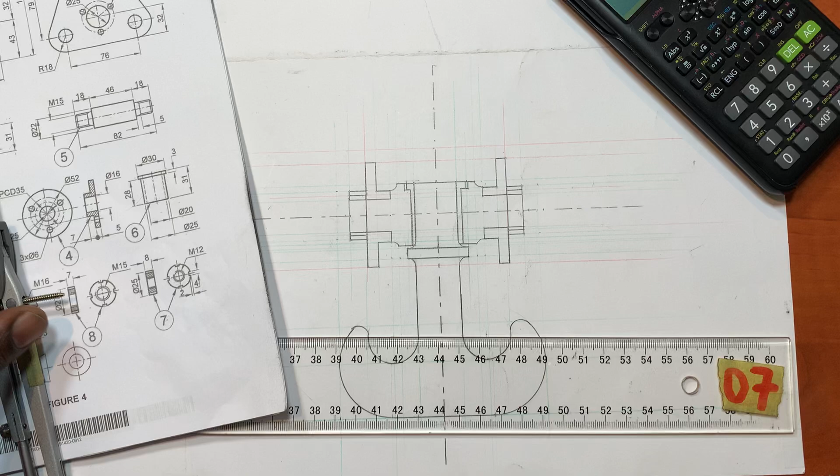So you're going to rely on what? You simply take this one. Item 2, aligning item 2 using what? Using these holes. So the holes are diameter 6, like I've said, so it's corresponding with this one. They also said diameter 6. So 6, 6, 6, still one and the same thing.

Understand? So I'm simply going to open my drawing compass to what? To 17.5. Remember, the 17.5 that I'm talking about is the center, is this PCD. PCD, I simply said 35 divided by 2. 35 divided by 2 is 17.5, between 17 and 18. So just come to the center and mark.

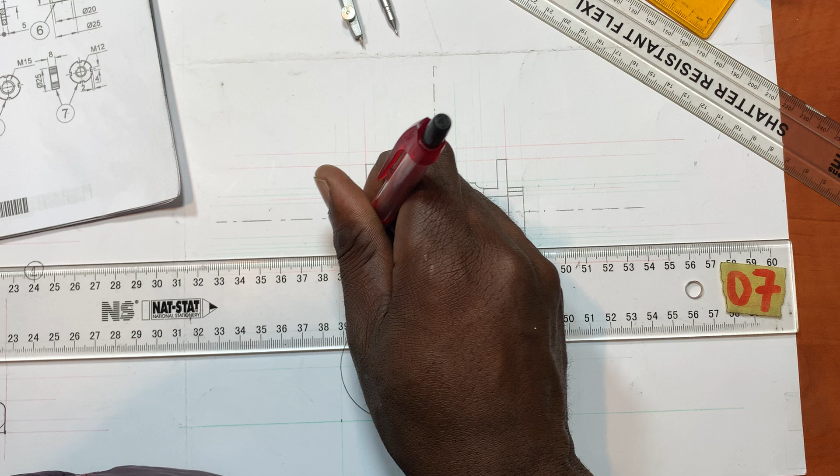So where I've marked, it's giving me the center. Even this side is going to be the center. Understand? So after you've gotten the center, simple, straightforward. You are told it is diameter 6. So 6 divided by 2, you say 3 millimeters this side, 3 millimeters this side.

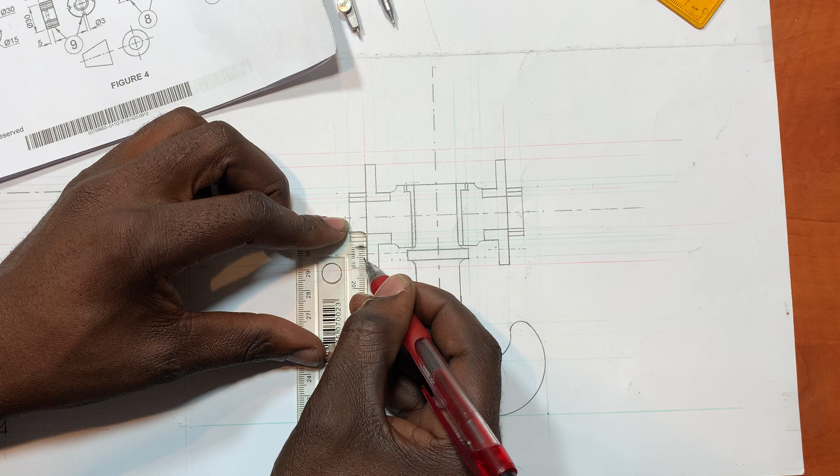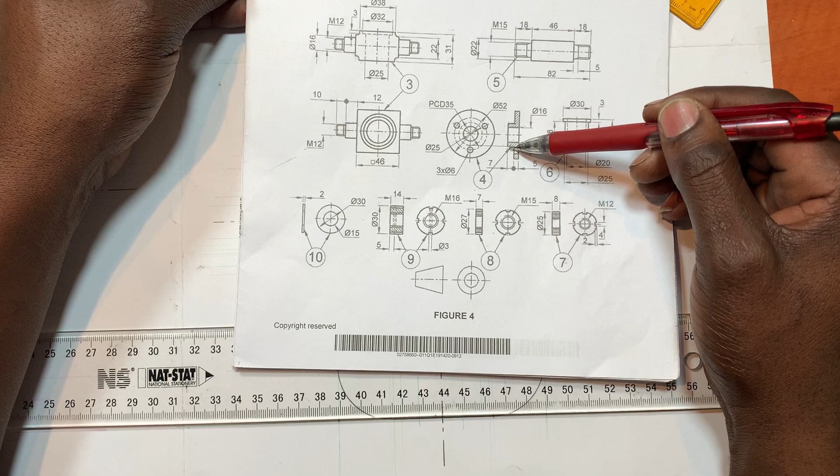Then after that, what is going to happen now? Okay, this plate, the inside diameter of it is diameter 25. So this 25 is corresponding with what? With this one. From here till here is diameter 25. You understand? So it is of a thickness of what?

Remember, I used to say to you, two or more things must agree. So item 2 is of a thickness 7 millimeters. And when you come to this one, from here till here is still 7 millimeters. So indeed, it tells you this plate is going to be fitted right here. So to draw it nicely, now you're going to rely on the center.

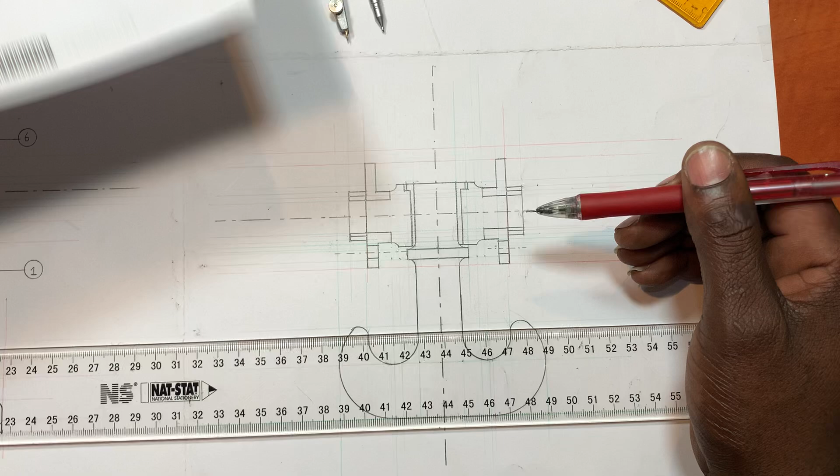On this plate, from here till here, they said 32. So from here going down, we are going to record where this plate has to be fitted, because from here till here is 25. So from this center, I'll record 32 millimeters and see where my 32 ends. 30, 31, 32, which is this one. You understand? So there is my 32 ending.

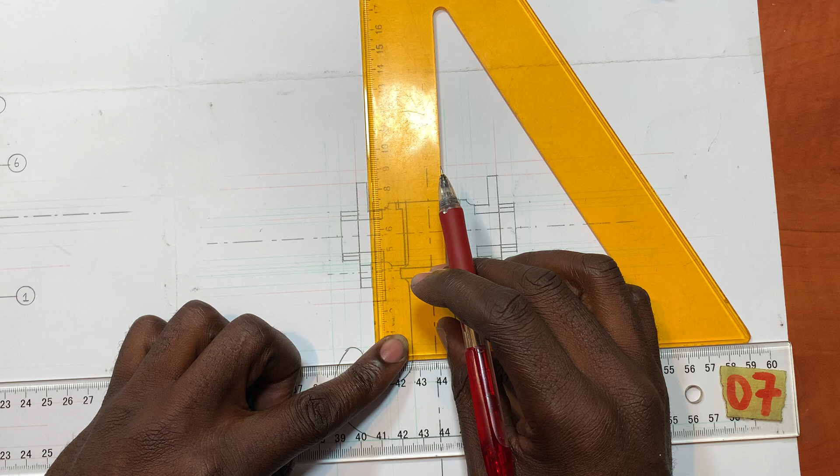So I can simply have this one solid and have from here till here solid. Now I'll come and have this one dark like this. There you go. So the moment I'm extending this one like this, I'm saying this is part of item 2. Item 2. Remember, how many times are you supposed to draw item 2? They said draw it twice. So I've already drawn it like this.

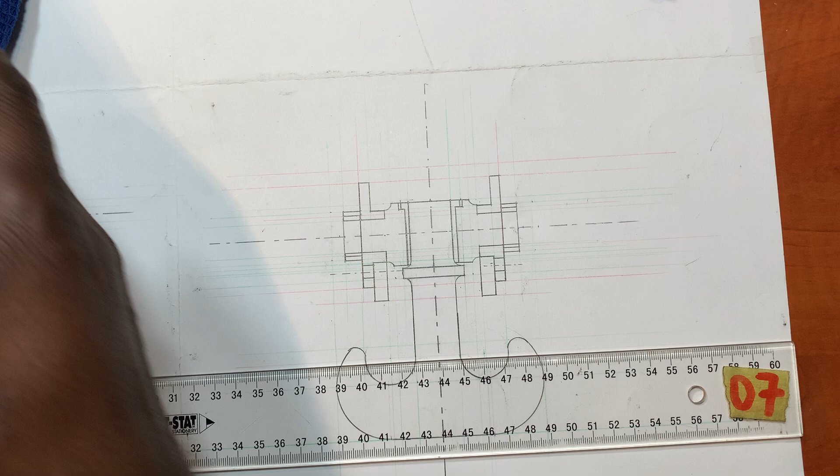Then from there, how am I going to draw it now? Just give a little bit of a zoom. Check this now, quite interesting. So from here till here is 32, which we've already taken. So from here going up, how are you going to get that?

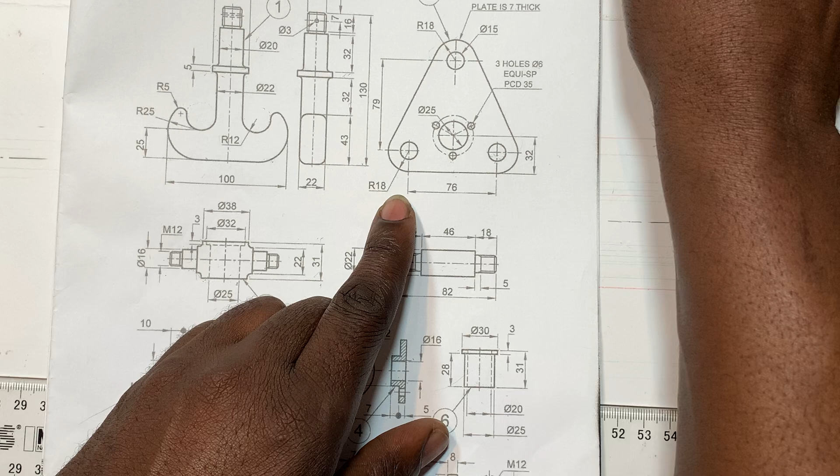From here going up, because this one from here is how much? It is 79, but this 79 is not actually starting from the center. Do you see? It's actually starting from radius 18. So from here till here is 18, isn't it? So since I started from the center going down, simple, straightforward.

From the center going down, I recorded 32, from here till here. So I can say 18, since this one is where my 32 ends. From here till here is radius 18, isn't it? I want to get the true height of it. So I can simply say from here till here 18.

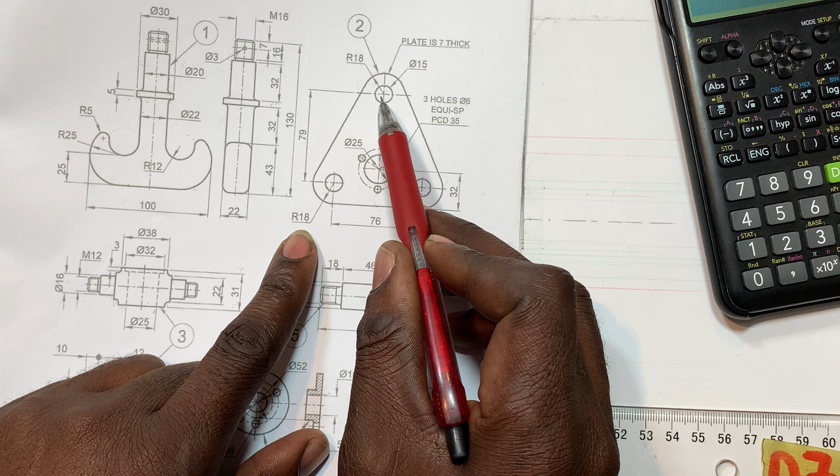So I'm going to say 18 plus 79, which is 97. And the 97 is still not going to give me the true height. I'll still have to add another 18. Simple, straightforward. So now from here going up, I'm going to record. You can even record it from the center, the same thing.

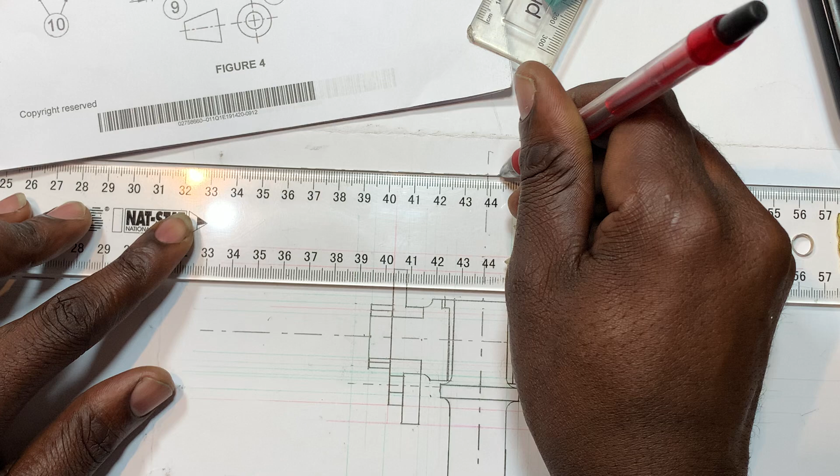97. This is 90, 95, 96, 97. Then I mark at my 0. There's my 97 ending, and it's giving me the horizontal center line. Draw it. So after I've drawn it, I can further extend this center. Further extend the center.

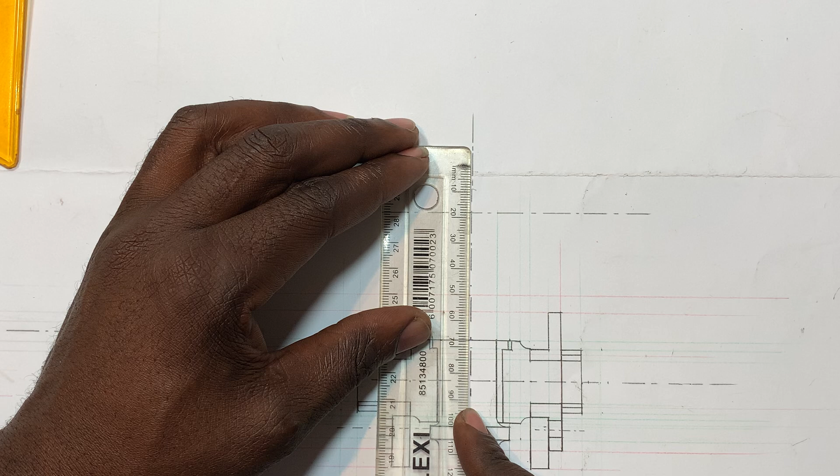Okay. Just extend the center. So that I add what? I add that radius from here till here, radius 18. Radius 18. This is 20, 19, I'm looking for 18. There's my 18. Understand? Where my 18 ends, I can put a horizontal constructional line. A1.

Then from there, what's going to happen now? Once you get there, my guy, it's going to have this one. Remember that this is going to be extended till up, but we are not quite sure. Is this going to be closed there? So it's better you draw it till like this for now. You understand? But you can just have it as a faint constructional line, faint for now.

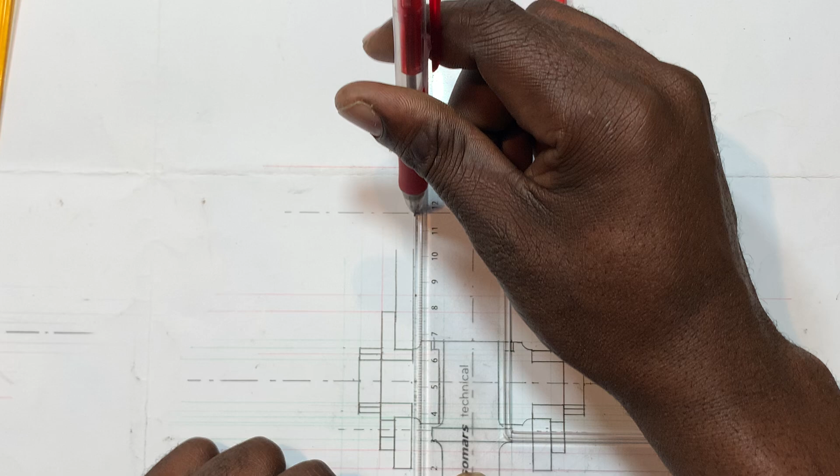But you know it is supposed to end there. So even this other side, it's going to be dark, going up like this. There you go. Just constructional line going up, right? So bring back your question. Remember, we've already dealt with these ones. Item 5 we haven't yet.

So double check the inside diameter and the outside diameter of this item 5. And how many times did they say to draw item 5? Item 5, which is the plate spacer, you have to draw it 2 times, which is 1, 2. And should we put the cutting plane here? So the other one is going to go with an offcut, the other one is going to remain. So it's going to be left there. Of what? Of item 5. It will be fitted here, inside diameter.

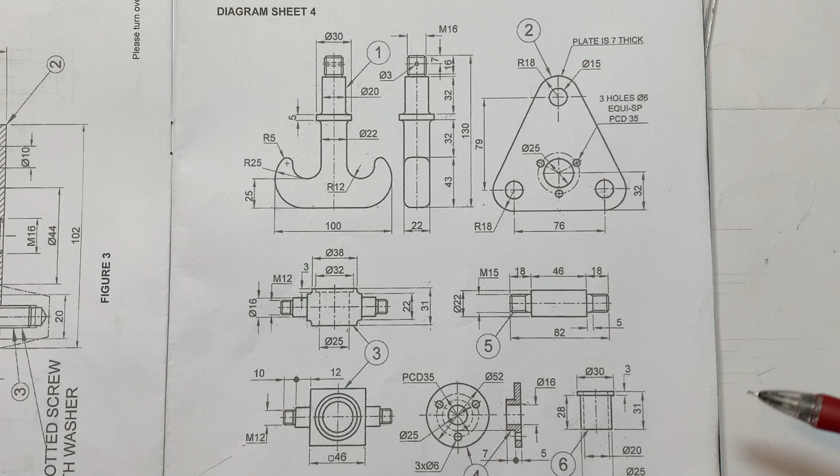So double check. From here till here is what? Is a diameter. Okay, from here till here is diameter 22. From here till here is M15. So this M15 corresponds with diameter 15. So indeed it is fitting in there. You understand? But it's going to be only this one that will be well exposed. That is going to be fitted right here.

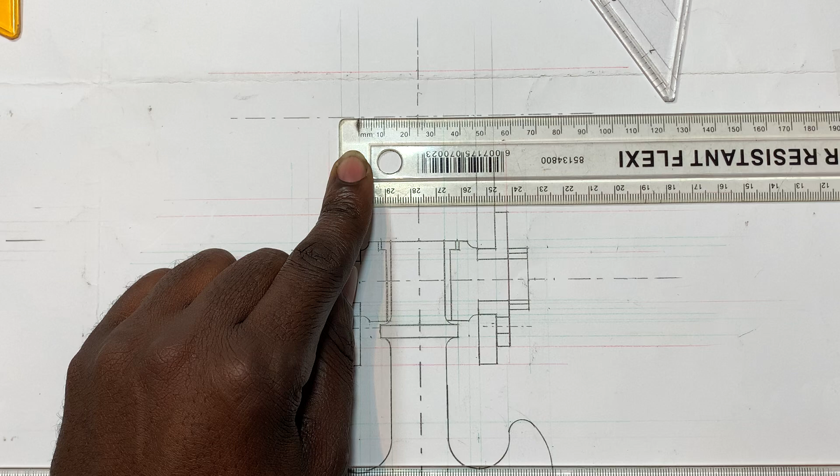So now, if we take this item 5 and fit it in there, it's supposed to be exactly tallying in there. How? If I take my ruler and record from here till here, I must be getting exactly what? 46, as far as I'm concerned. Let me check that. 46, which is this one. Do you see that we are absolutely correct? This is 40, 45, 46. It shows that we are on the right track, my brother.

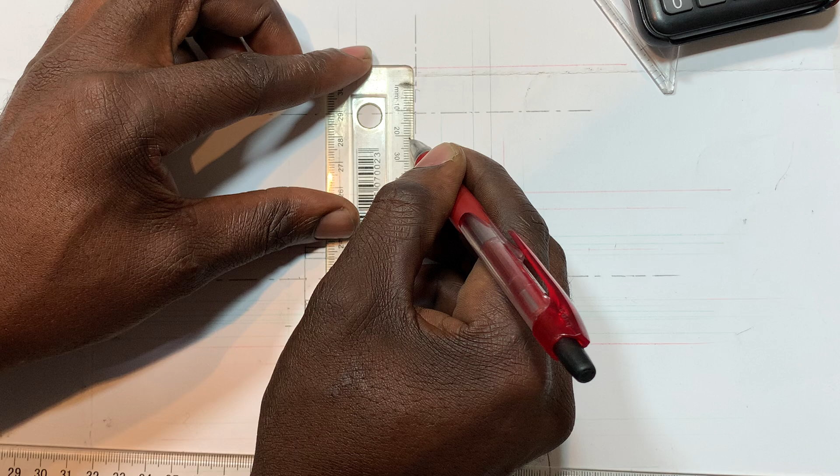Simple, straightforward. So now, we are going to draw this one. From here till here, 22. So if you say 22 divided by 2, how much are you getting? Getting 11, right? So you're going to say 11 this side, 11 this other side. How? Like this. This is 10, I'm looking for 11. Just mark it 0 and mark it 20, 21, 22. There's my 22. So I can simply have a constructional line horizontally and another one. You understand?

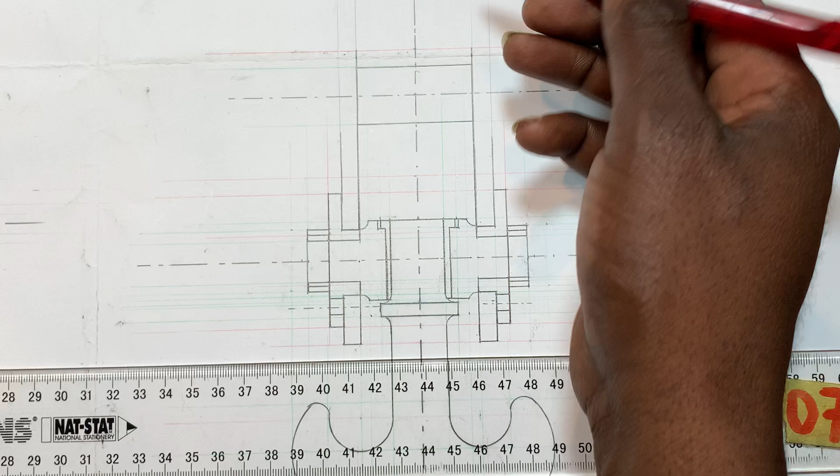So I can have this one solid from here to right here. Have this one from here to right there. And this is a shaft. We do not section a shaft when it's cut along its length. So which means I can have it dark from here till right there without fear or favor, my brother. You see, I'm already accommodating the true height of this plate of mine.

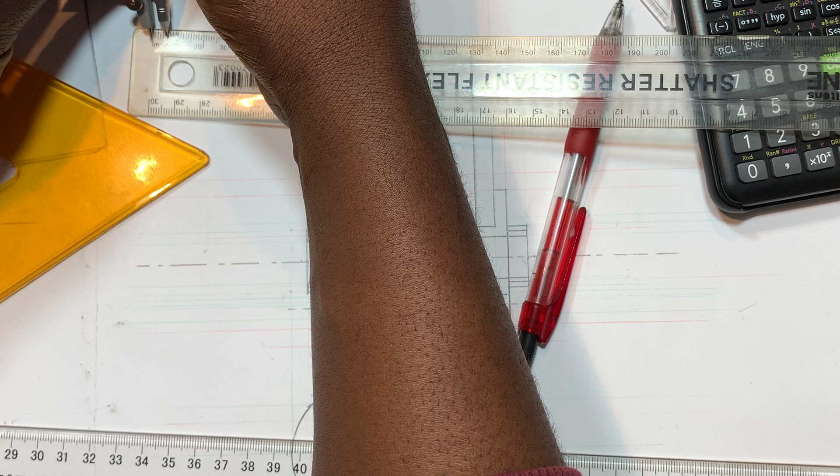Five, 6, 7.5, between 7 and 8. So I come and place it here. I mark and mark. Then after that, I can come and have this one construction line. Have this one construction line. Okay. After that, where's my 7.5? It's this one.

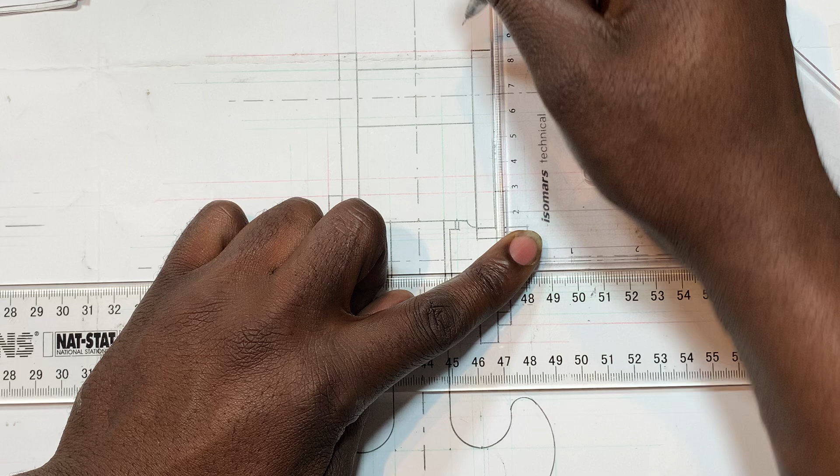So I can have this one now, this plate of mine, darken till right here and come and finish up here. Even this other side can have the same thing, from here to right there, and come and finish up right here. So that I can have this one now extended just a little bit. Just a little bit. You understand?

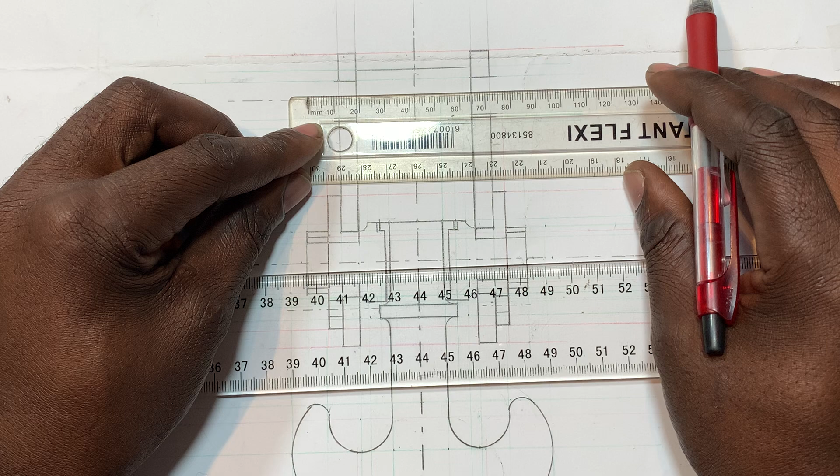So how long is it supposed to be? Bring back your question. The set is how much? It's 18 millimeter. 18 this side, 18 this side. This is 20, 19, 18. There is my 18. So I just mark it 0 and put it at 0. Then 19, 18 right there.

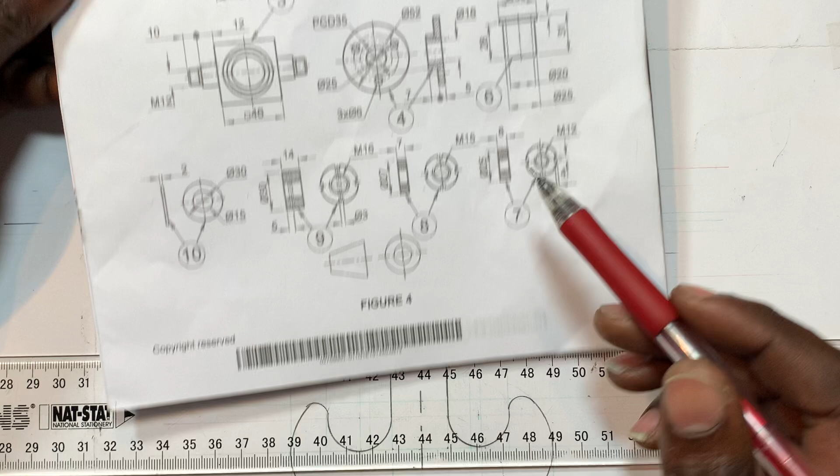Then from there, where it's ending, I can just have a constructional line vertically down, and even this other one vertically down. Okay. After that, what is going to happen now? So if it's M15, which means we must put what? Item 8. So item 8, how many times are you supposed to draw item 8?

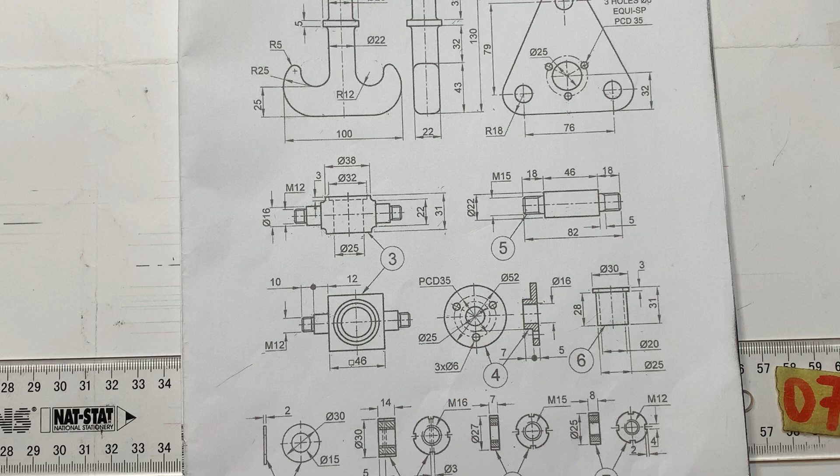Item 8 is the long nut, 6 times. So if they say 6 times, it's supposed to be 2, 4, 6. 1 this side, 1 this side. Come. 1 this side, 1 this side. Come. 1 this side, 1 this side. So that is why they said 6. So you have to be very careful of that. If they say 6, it doesn't mean that you'll be drawing the whole 6. You get what I'm trying to say?

So by the look of things, we will be drawing 2 rather than 6. You understand? So it's M15 corresponding with that one, M15. Okay. Now, when you look at your item 9, we haven't inputted item 9 yet, and item 9 is already clear enough. Do you see that it's the pin that has to run through there?

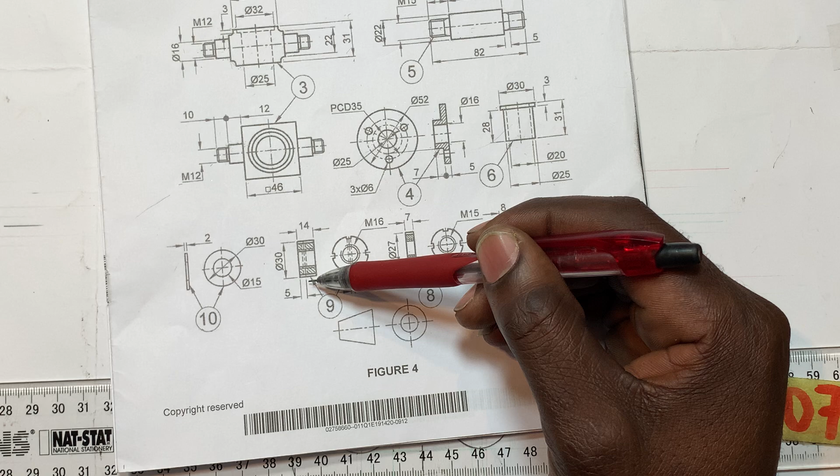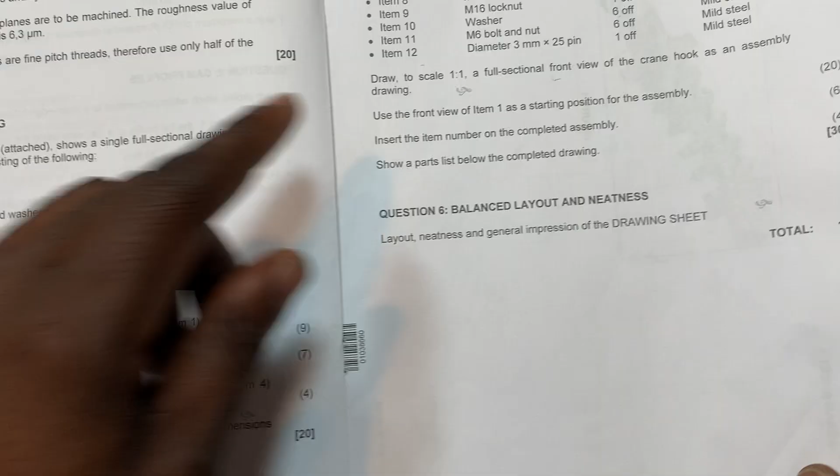So item 9 must correspond with what? With this one. So remember to hold this thing steady. So you have to put your item 9 on top there. Simple, straightforward. You understand? So after that one, put item 10. Look at item 10. The inside diameter of item 10 is 15 millimeter. And how many times did they say draw item 10? I'm sure 6 times as well. Item 10, 6 times.

So which means 2, 4, 6 again. So in other words, we have to draw 1 this side, draw 1 this side. Get what I'm trying to say? What is the thickness of it? They said it's 2 millimeter. So to draw that is going to be right here. Remember, I said to you, extend it just a little bit. I can put it at 10. So 1, 2. You understand? So even this side, 1 millimeter, 2 millimeter,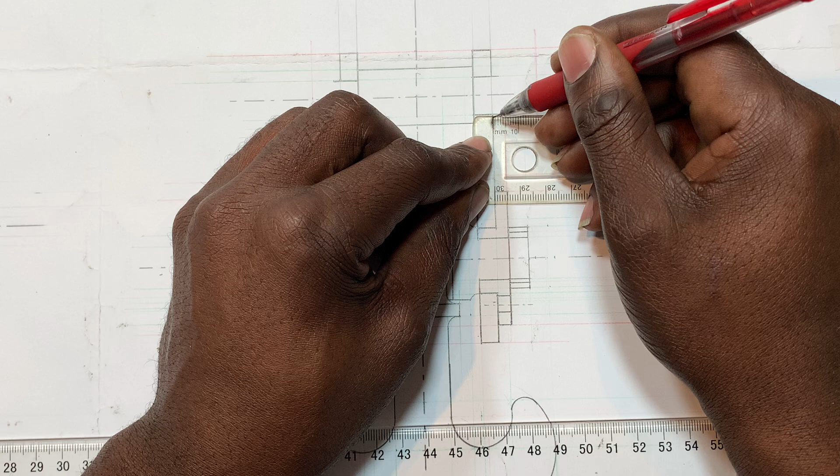ending right here. So even this other side, remember I said just extend it a little bit. 0, 1, 2. They said a thickness of 2 millimeter. 0, 1, 2. You understand? Then after that, what is the outside diameter? Outside diameter, 30 millimeter. So 15 this side, 15 this other side. So I mark it 0 and mark it 30.

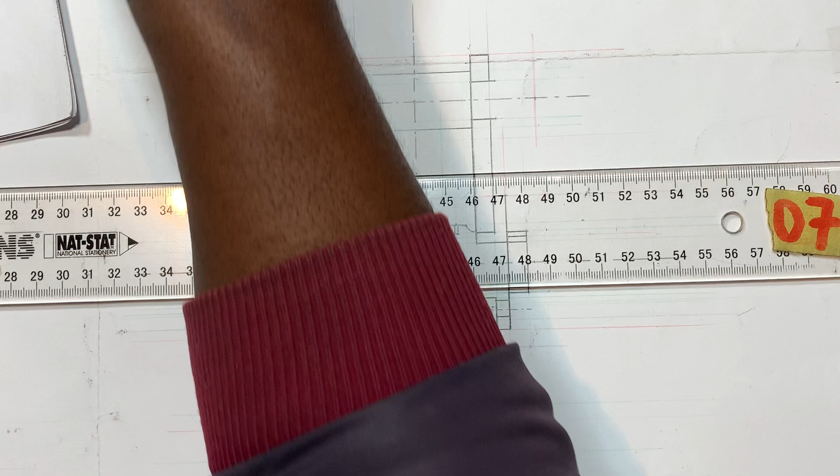Then I can have a constructional line, such that I can have this one faint. So from here till here dark, from here till here dark. Again this other side, from here till here dark. So that I can have this one solid, this one solid, this one solid, this one solid. Since we are going to put a nut now, we have to close here. Close it here.

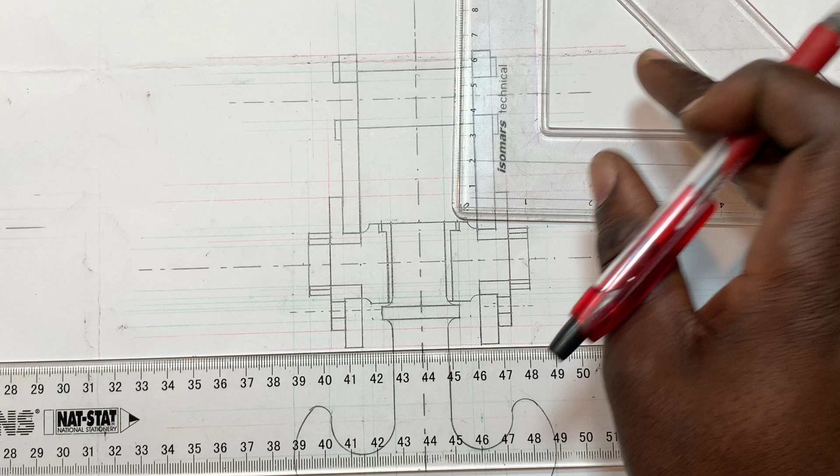Let me double check. Is it going to be closed? Because we are going to put this one. Yes. Okay, there will be this part of a shaft. So I cannot close it. It's going to be well exposed. So I can leave it like this. So where's my 18 millimeter ending? Right here, and right here, 18 millimeter.

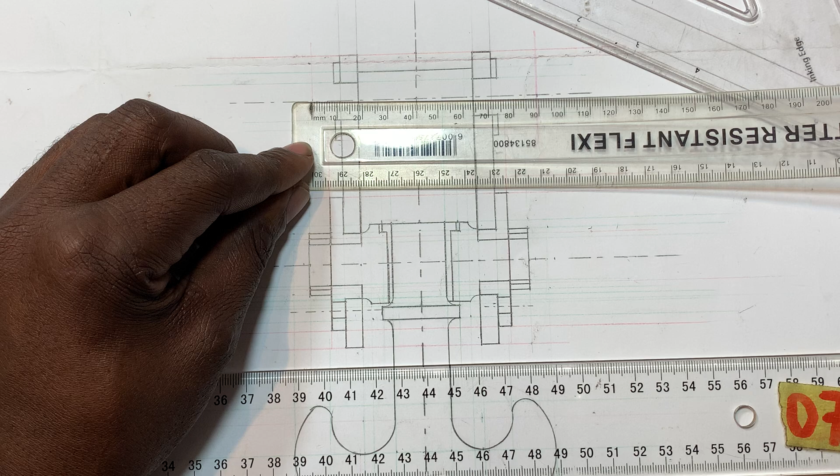Yes, right here. So now, after this one, we can begin to put item 8. Item 8 is of a thickness 7 millimeter, inside diameter 15, which is this one. Thickness 7 millimeter. So which means I can just have a constructional line. That's going to be like this.

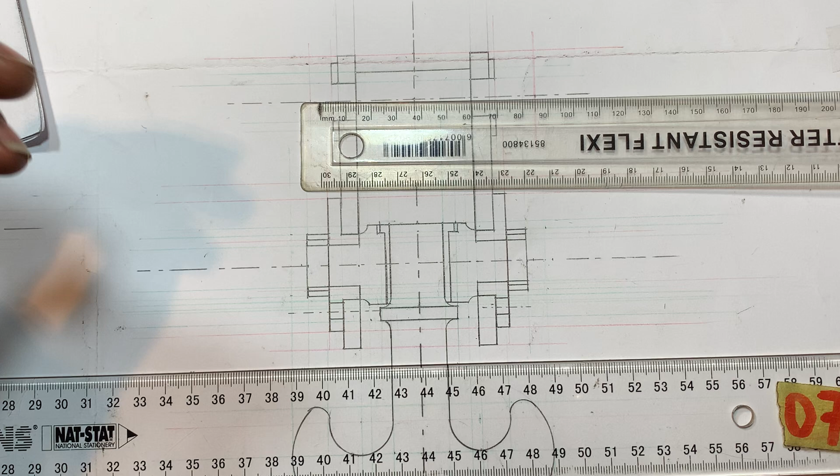That's going to be like this. So I'm going to record how much? 7 millimeter. 5, 6, 7 millimeter. Just that one. 5, 6, 7. That's the thickness of the item. There you go. It's gonna end here. There you go. It's gonna end there.

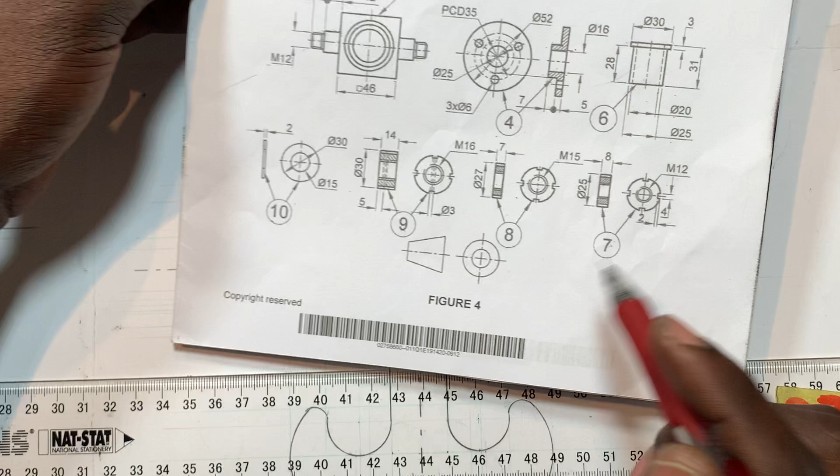So the outside diameter of it. Item 8. So remember, item 8 from here till here is 27. We are given everything here. So 27 divided by 2, how much are you getting? 13.5. This is 13.5, between 13 and 14. So I can come and place it at the center, and mark here, and mark right there.

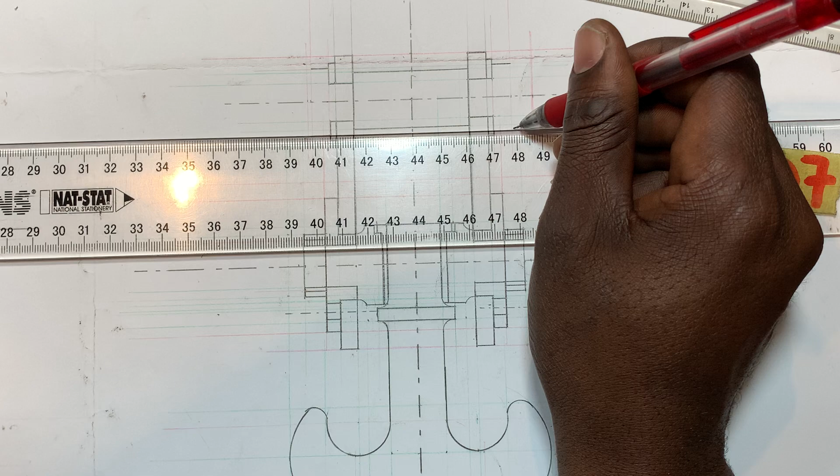Then from there, constructional line, but from here till here, solid. From here till right there, solid. This one solid. Then I bring them down again to the shaft. You understand? So this should still be part of the shaft. This one. Then you come and look at the what.

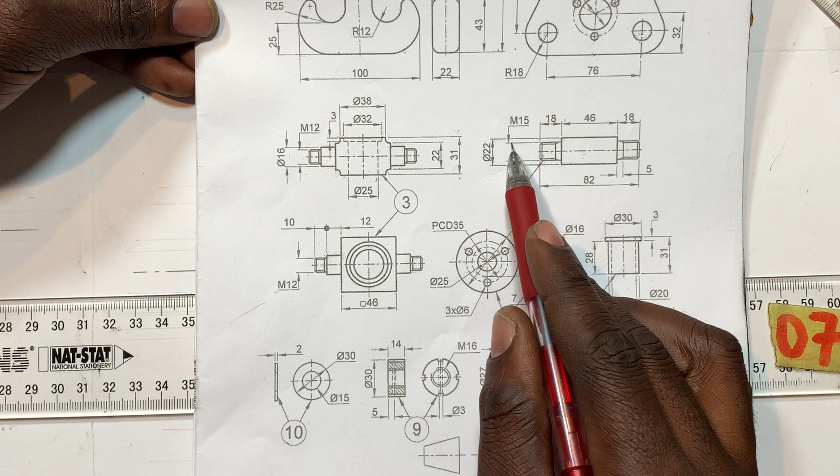So remember, the shaft is supposed to end there, and this shaft is M12, no, it's not this one. It's M15. So I'm going to say 0.1, which is the thickness of the thread, times 15. So it's 1.5, which is already that one. Do you see? 1.5 is between 1 and 2. You understand? So from there, you have to do this one.

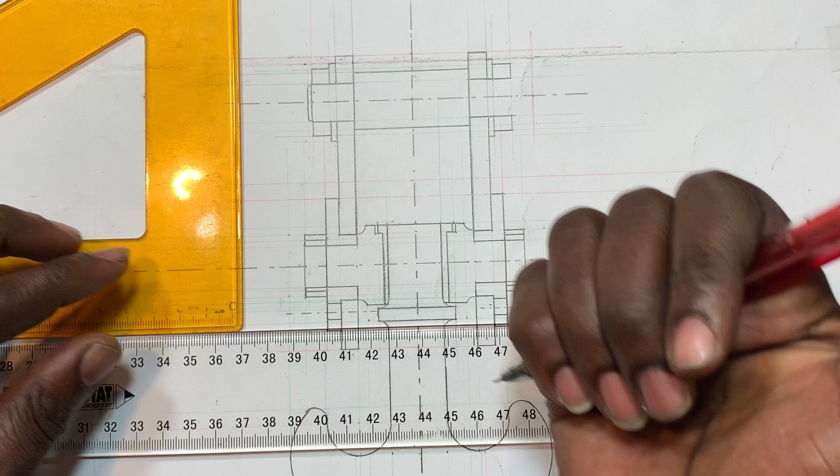45. Is it 45 or 60? Yes, it's 30. It should be like this, this is 30, and I was actually on the right track. Then close it. There you go. Which one is this that I'm drawing? It's actually that one from here till there. So from 18. So where is my 18 ending this side? There is my 20, 19. There is my 18 ending. You understand?

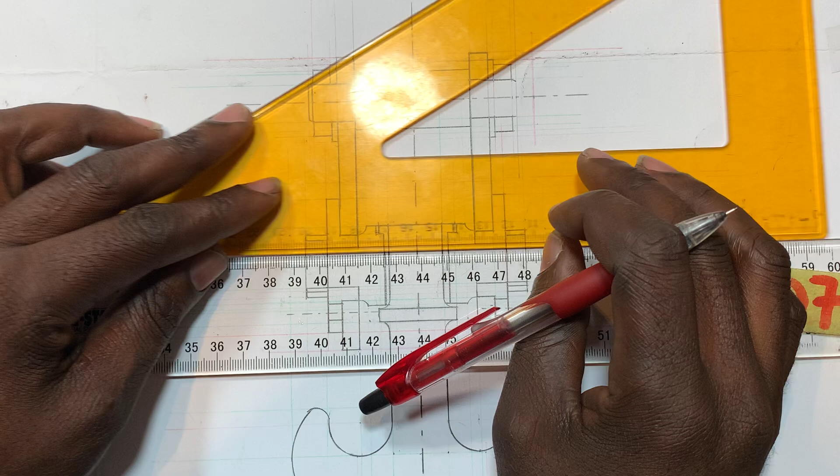So there you go. What I did this other side, I'm now doing this side. Even this side. There you go. So here it's gonna come back and have a solid line here till right there, and another one right there. So in other words, you draw this shaft exactly the way you see it.

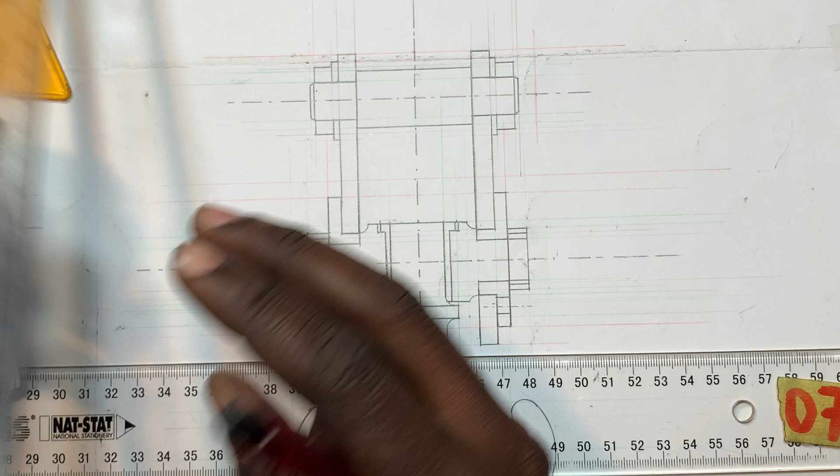But then double check the nature of your item 8. Remember, item 8 is still having that 2 millimeter. So which means from here till here has to be 2 millimeter. So 0, 1, 2. There's my 2. Even this side, 0, 1, 2. There is my 2 millimeter. So that I can have this one solid from here till there. Even this other side from here till right there. So I'm done with item 8.

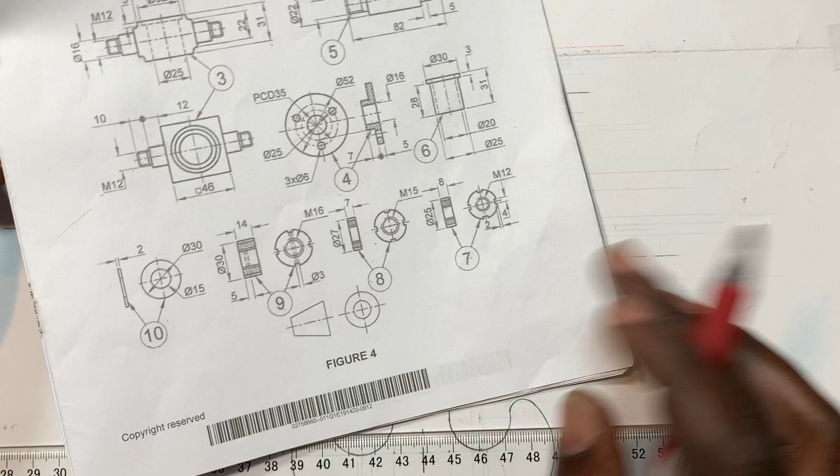So the very last item that we have to look at is item 9. The item 9 is going to be fitted down right here, my brother. Remember, we haven't done with your item 1. I said to you, you are going to record. Okay, we've already recorded the 130. So the 130 is starting from here till right here. You can still double check if you've forgotten; your 130 is that one. You see, it's actually ending right there.

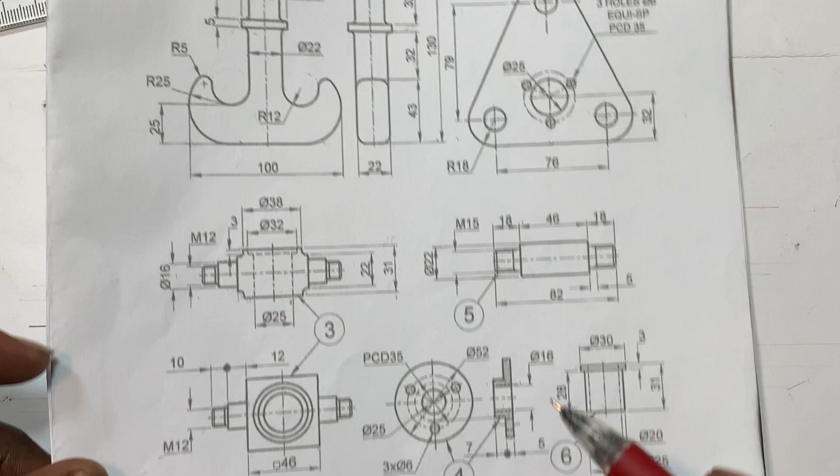You understand? So it's of M16, and when you take a closer look, item 9 is M16 again. I said to you, two or more things must agree, which indeed is going to be fitted there. So we are going to remain with these ones. It's of diameter 3 millimeter. Do we have 3 millimeter? Which is that one. Simple, straightforward. That's how you assemble it. It's gonna enter, interlocking each other.

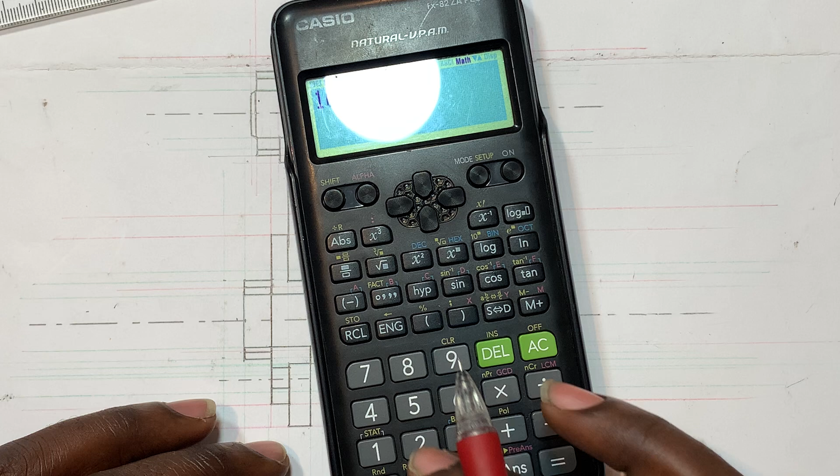So what we can do now, we will divide this 16 by 2, which is 8 millimeter. So I'm going to record 8 millimeter this side, 8 millimeter this other side. I'm looking for 8, which is this one. So I mark it 0 and mark it 16, which is this one. Then after that, I can just have a constructional line for now.

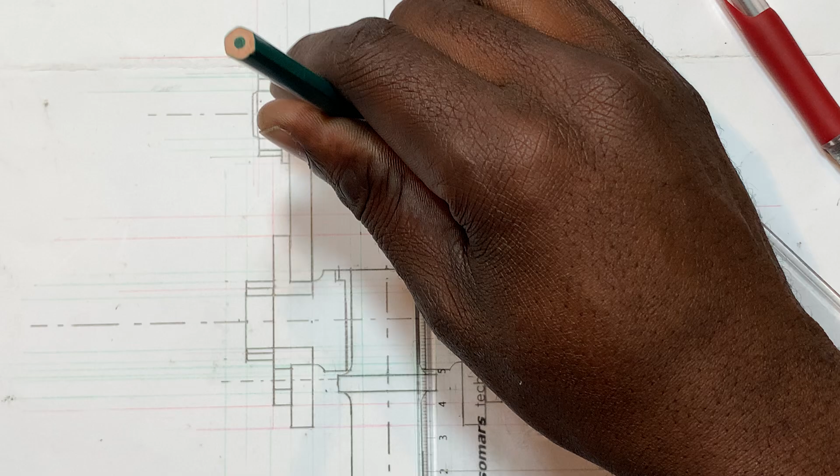Constructional line. Make them clear. Constructional line. Constructional line. Okay. So if you are done with that, what is going to happen now?

So from here till here is 16 millimeter. So I'm going to record 16 from here going down. So 15, 0, 10, 15, 16, which is that one. I want, which is this one, ending right there. Just have a constructional line.

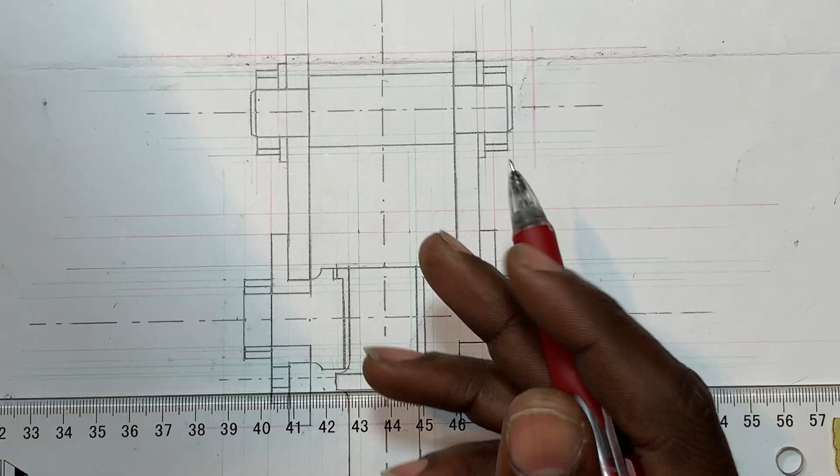So this smaller linear thickness is which one? Is that one that at the beginning of the lesson I said is gonna come out by itself. So the thickness is 16 millimeter, whereas the thickness of this lock nut that we're supposed to put there is 14. So we have to align it using what? Using that 7 millimeter. So from here till here 7 millimeter.

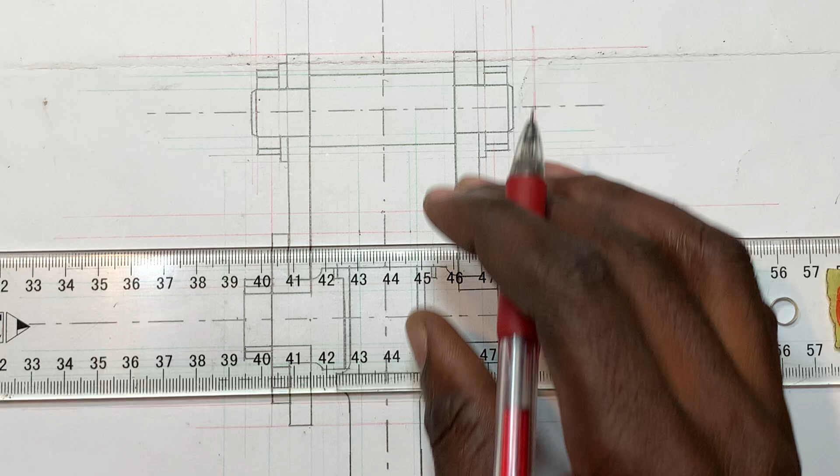From where your 16 start. So my 16 begin here. So I have to record 7 millimeter. So 5, 6, 7 millimeter, which is this one. So I'm drawing this center line, horizontal center line, which is that one.

Remember, I used to emphasize that horizontal lines, a constructional line as well as your center line, they must exceed your drawing, because you can see even here it's exceeding, but the inside hidden details doesn't exceed, but you can actually see your center lines exceed. So that is why even me, I'm drawing a little bit bigger.

So now I can come and get the outside diameter of this item 1. So from here till here is 30. So I'm going to say 15 this side and 15 this other side, which is this one. So I mark here and I mark at 0. 30 and a 0. So I can have this one faint, this one faint. So the thickness is 14.

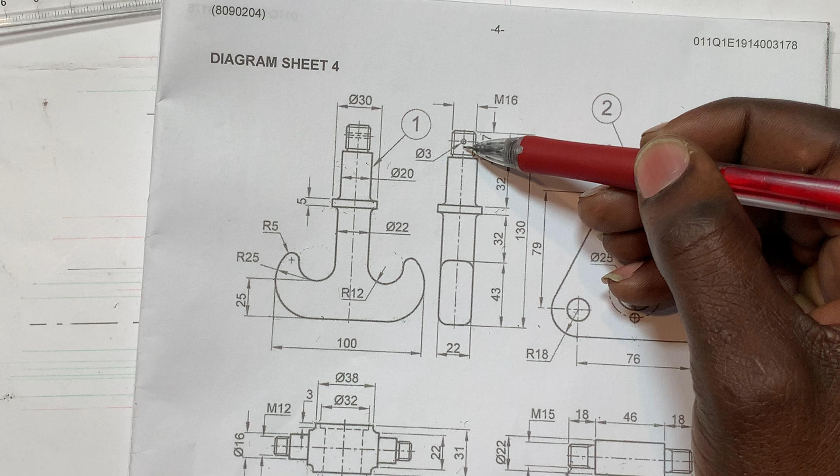And which correspond with what? With that 7. Do you see I'm actually reading the 7 from what? From my item 1. So it's corresponding with this thickness 14, because the half of 14 is 7. So I've already said from here till here 7 millimeter. So from here going down it's another 7 millimeter.

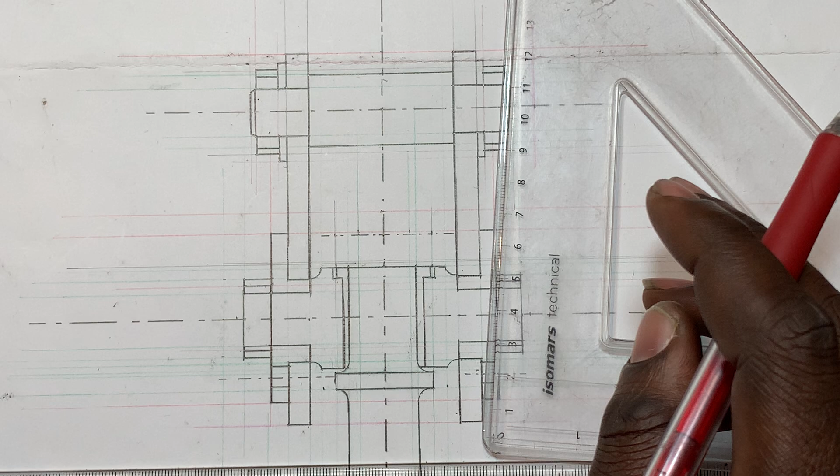From here, which is another 7 millimeter, which would be that one. A1. Then, which now I'm going to have it dark. Dark from here till here. Dark from here till there. So this one, it should be dark from here to right there. Then this one, dark from here to right there.

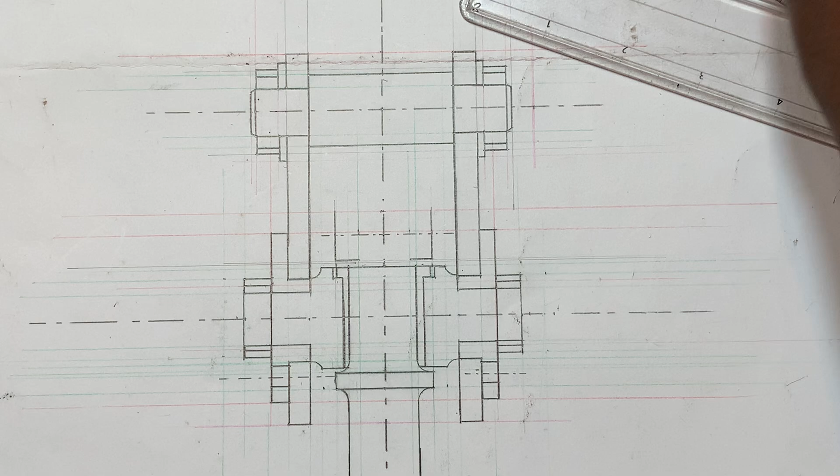A1. So remember the thickness of 16 millimeter. Because you have to go till here, go to right there. 16 millimeter. Let me double check. Yes, which is that one. Yes, it's gonna go dark till down here.

Let me double check. From here till here is what? The inside diameter, it was 20 of the bush. So from here till here is the 20 that I'm actually reading from my item 6, which is corresponding with that one of item 1. But from here till here is smaller than this one. So that is why in our drawing it is also a little bit smaller. You understand?

So there it is. You see that I'm not drawing till here, because there will be a shape. You have to get this shape. Understand? So this one dark, close it here. Close it till there.

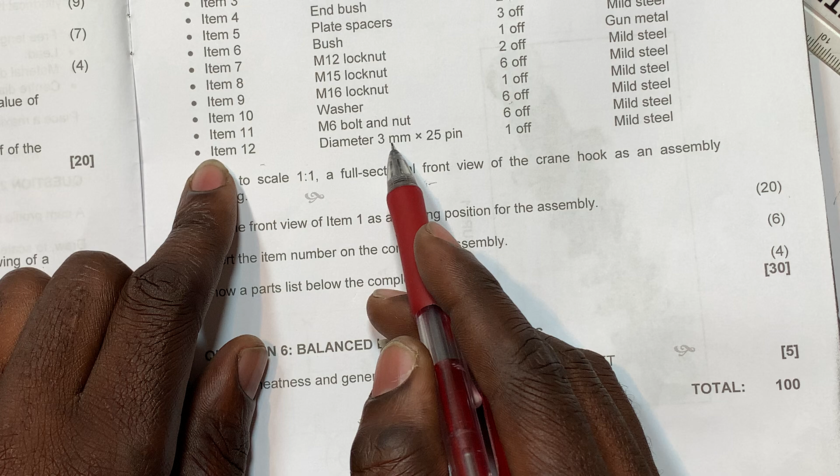So even here, there will be a pin. Where is this pin that's supposed to be fitted here? Because there is a pin of 3 millimeter that's supposed to be fitted here. Go back to your pin, item 12, which is diameter 3 millimeter times 25 pin. We have to draw it once, so 25.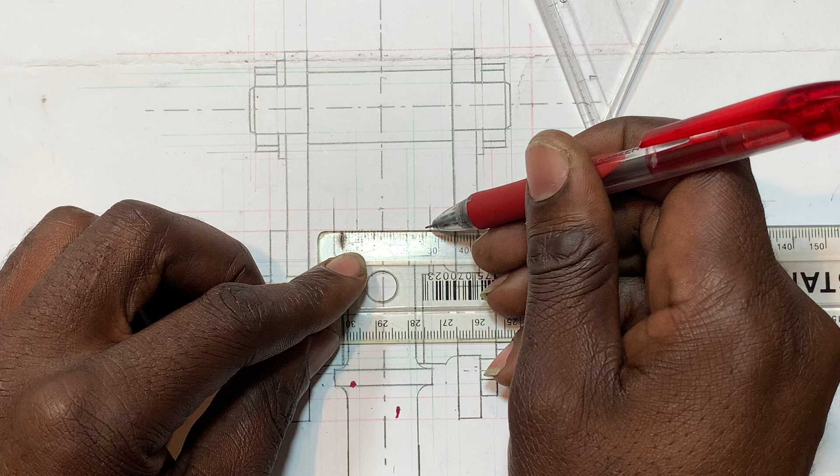So if there will be that pin there, it means I was too forward to close it here. Here you don't close it, you have to erase it here. Even here, this pin of ours, they said is of 25 millimeter, so it's going to be 12.5 this side to 12.5. This is 11, 12.5, between 12 and 13. There is our 25 and a 0 and 3 millimeter. So this pin of ours is supposed to end here and here.

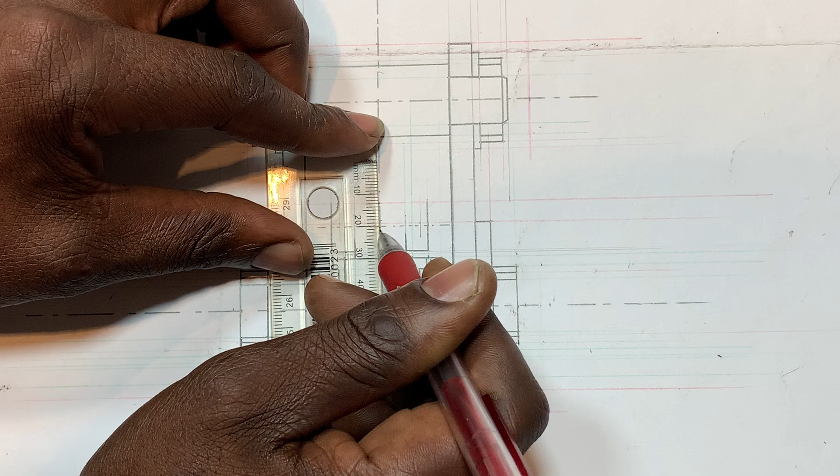So when you say 3 divided by 2, you're getting 1.5. So you're going to say 1.5 this side, 1.5 this side. Something very small. Let me do like this. So this is 0, 1.5, which is here, 0, 1.5, which is right here. So it's going to be drawn dark. So it should be dark from here to right there.

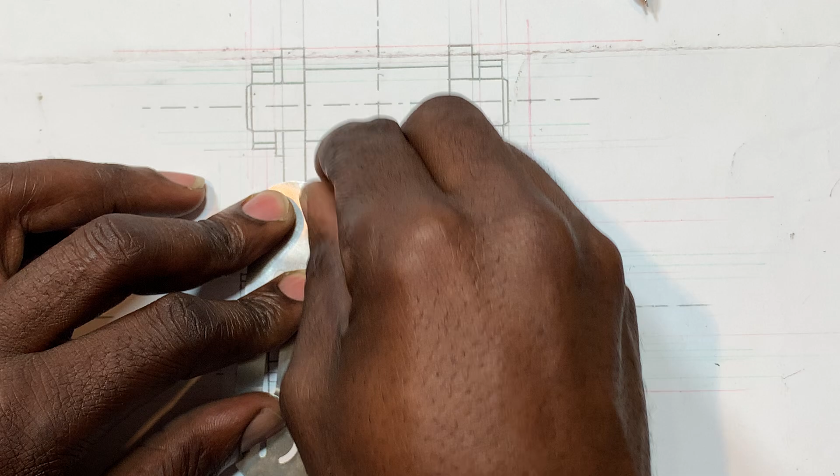From here to right there. Just erase it a little bit there. Erase it a little bit again. So this is going to be that pin, which they said is not shown. It's going to be that pin of length 25, diameter what? Diameter 3. So I can now have this one solid.

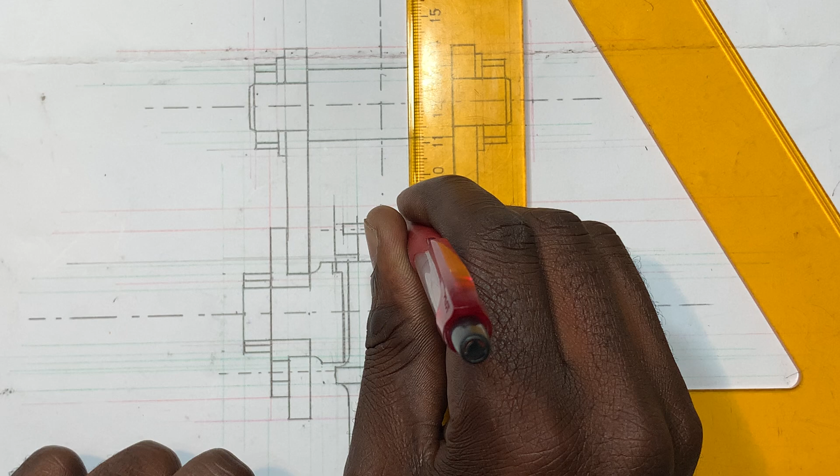Remember, we draw it solid. That's why I was like, we were too forward. It's going to be solid up until this pin. You stop even here. Then beyond the pin, it can go. Understand? So from here till here, it won't be dark. That's what we were erasing actually. Okay. So now it's gonna go dark till right there.

So now let's double check, because as far as I'm concerned, this nut of yours is not gonna end on top there. It's of a thickness 7 millimeter. Double check, simple, straightforward. This is 5, 6, 7 millimeter, isn't it? There is my 7 millimeter. Then I can place it at the center. I mark here and I mark there. Okay, I've already done it, which is a little bit down. There is my 7 millimeter.

As such that now I can have this one dark from here till there, and complete it dark here, like this, and like that, so that we have this one dark here, dark right there. So from here till here you can erase it. You see how small it is? Something very small. Which is this one. Even this other side you can remove it, my brother.

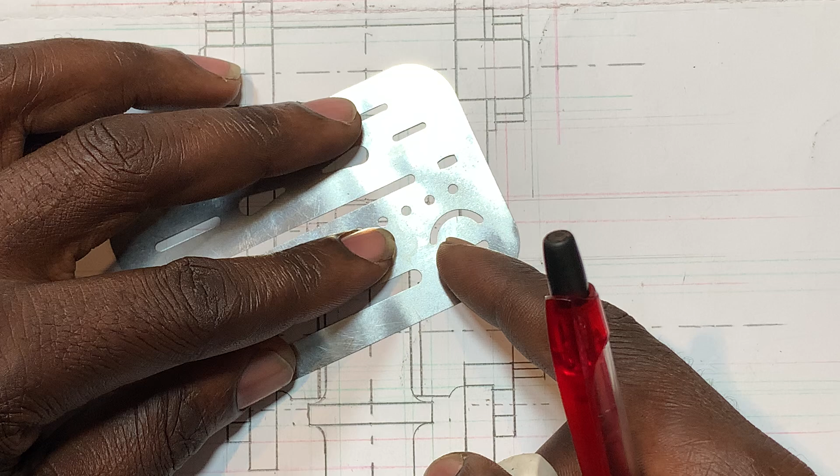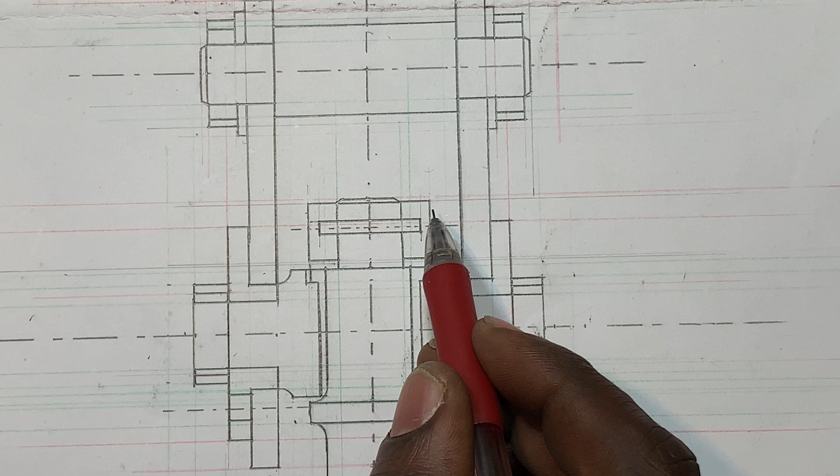So it's going to be a sharp corner. Okay. Once you get there, erase this one. Erase this one. So now you can simply see your item 9 clearly. But then it has got that smaller 2 mm, which is what you did in your item 7. So it's supposed to come this side. You understand? So which is going to be this one.

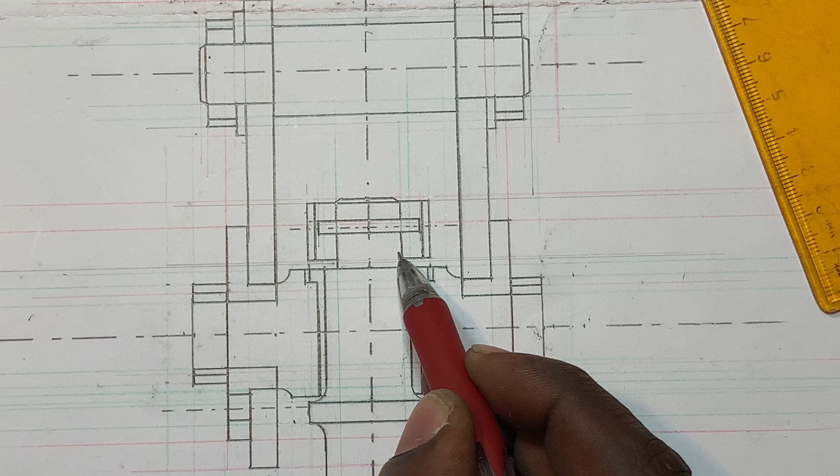0, 1, 2. One, two. Something very close by. So it's going to be solid here and solid here. So when you section, you'll be sectioning here, but here you don't section it. So I can have this one a little bit extended till here, because it's supposed to be like that in general. Yes. Then if you're through to such an extent, you are done.

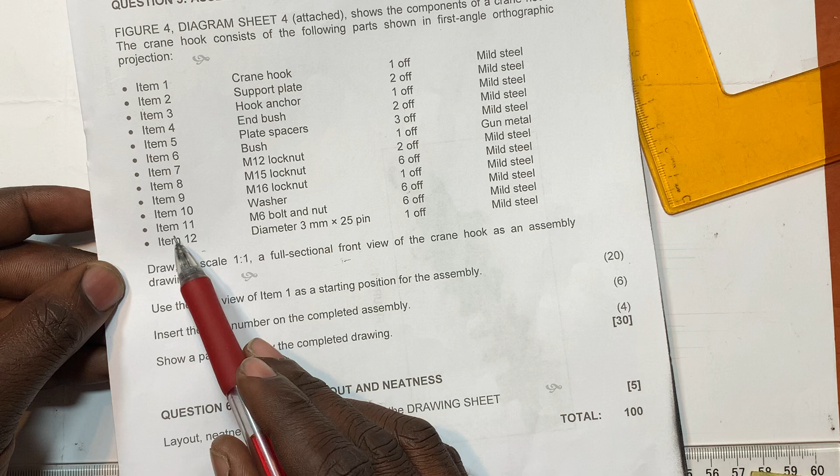We can begin to section now. And we are not yet through actually. There must be a, double check, what was supposed to be fitted here? Go back to your bolt. They said item 11, which is M6 bolt and nut, supposed to be fitted here. So we were too forward again. Where's my eraser? To have this one closed from here till here of the bush.

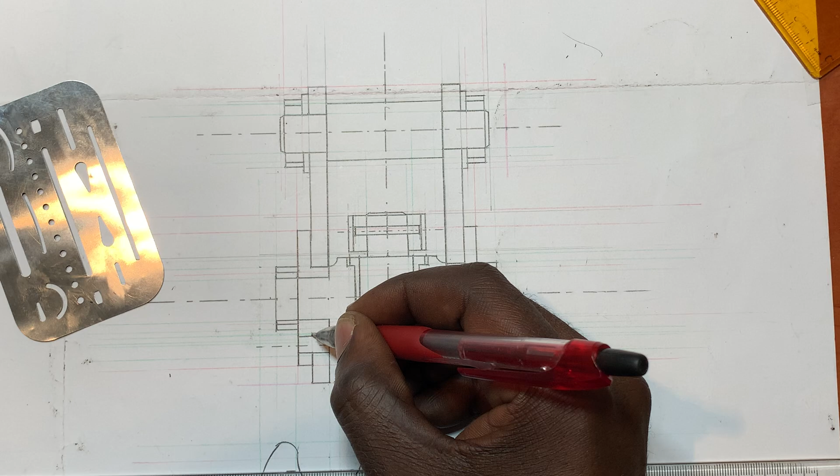Remove it. Remove it even here. You understand? So that it should be extended till right here. A1. So even this other side, you remove it. That was the long one. Even here, remove it, so that it's a little bit extended here, so that you put your item 11. The bolt and nut. Item 11, M6 bolt and nut. 6 of them.

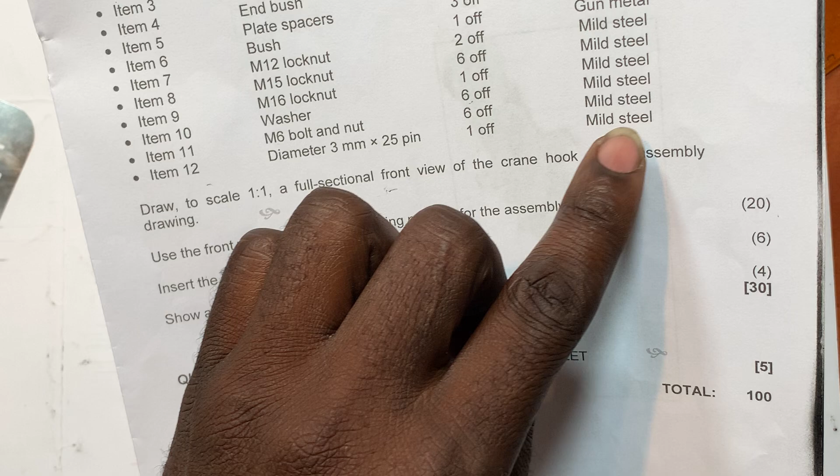So if they say 6, remember, it's going to be fitted here. Diameter 6, which is M6, is going to be 2, 4, 6. You understand? Then after that one, you section. So to draw that one, you still remember the bolt and nut method. You have to remind yourself of the bolt and nut method.